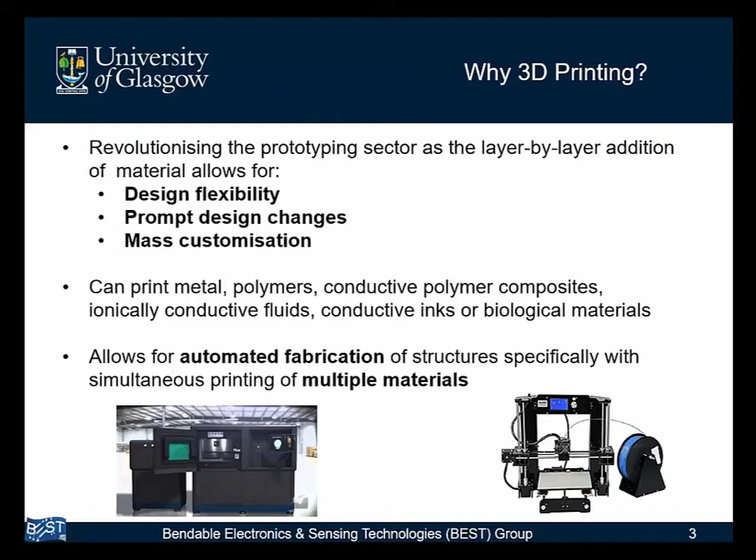In terms of materials, 3D printing has generally been associated with polymers and metals. However, now you can look at a bunch of different materials that can be printed using 3D printing, and we are hoping to exploit that possibility into many avenues. On top of that, from a fabrication point of view, 3D printing can provide automated fabrication with multiple materials simultaneously to help us achieve our goals.

In terms of 3D printed circuits and systems, the primary goal is that we can efficiently use the 3D space available within the structures. Particularly we can form complex geometries that we can't really attain using traditional fabrication techniques, particularly thinking about printing in and out of plane.

One example is the work we presented involving an embedded sensor with printed passive components. This is really interesting, particularly if you look at the long term and at customization and the way we can alter the shape and the different circuits within the shape. We can also start to think about bendability and bendable materials in terms of substrates and conductive materials as well.

Moving to multi-material 3D printing: it's quite difficult to integrate some of the established 3D printing techniques such as stereolithography, laser sintering, or binder jetting with multi-material printing in those systems. They're also quite difficult to set up and customize to your own specific use, and they're at a much higher cost than other types of 3D printers.

So if we look at fused deposition modeling and liquid deposition modeling, we can use the fact that they are open source, readily available, customizable, and low cost to our advantage. But the main point is that we can still print multiple materials at the same time.

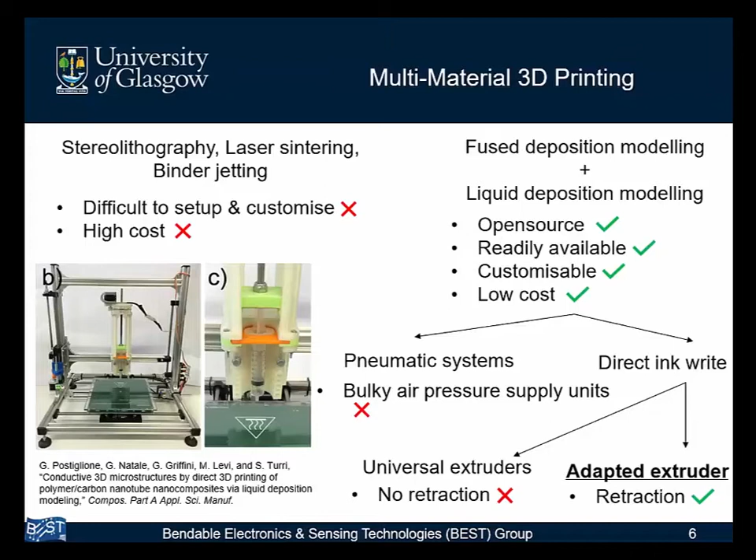For liquid deposition modeling, we've chosen a direct ink write method instead of pneumatic systems. Although pneumatic systems might provide a little better precision, with bulky air supply units they're probably not as readily available or distributable as direct write ink methods. Also, in terms of the extrusion mechanism, a key element to consider is retraction of the conductive inks during printing, because one thing you want to avoid when printing tracks or interconnects is cross linkages between the printed tracks.

So for multi-material 3D printing, we've gone for FDM for printing the substrate, but also printing some conductive materials, conductive solids, and adding a paste extrusion mechanism for the multi-material 3D printing.

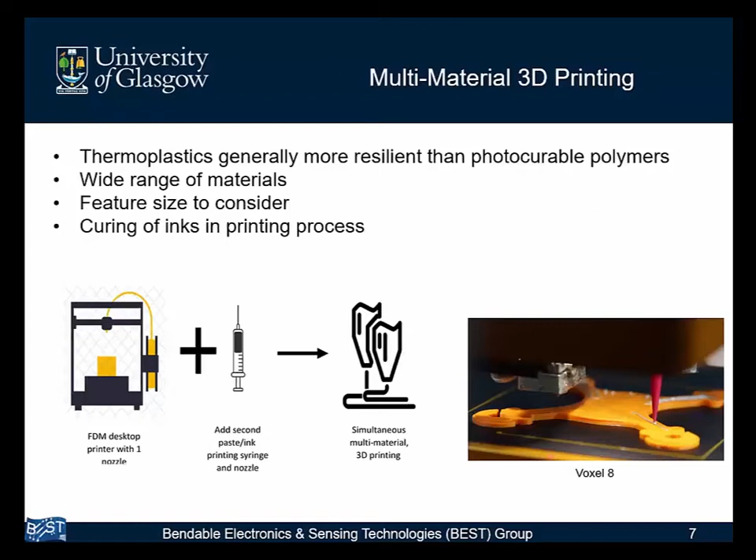Things to consider are our feature size, the curing process, and the materials, which I'll talk about in a minute. In terms of printer customization in our lab, we've integrated a readily available desktop 3D printer, the RepRap, and added the Discov3ry paste extrusion system to that.

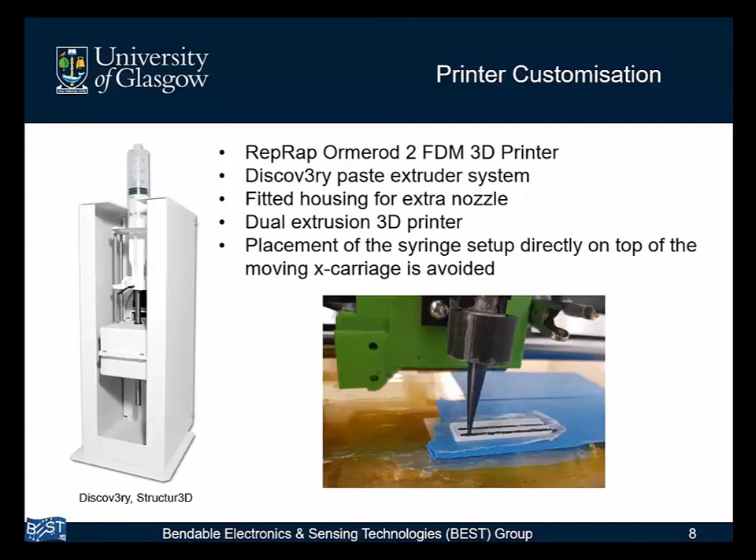One really strong advantage of the Discov3ry paste extruder system is that it's not directly placed on the X carriage of the 3D printer. By not placing it there, we avoid added vibrations to the printing setup while printing, which may cause discontinuity within the prints, especially with a large system and a large extrusion mechanism if we're looking at a large amount of material. But not only that, in case of a large weight on the X carriage, it might cause a misalignment between the printing X carriage and the bed level as well.

The paste flow itself goes through the syringe and through a Bowden tube, then through a Luer lock connector and through a nozzle. The particular nozzle we chose is 0.4 millimeters. However, another advantage of this is that the nozzle diameter is easily changed by changing the nozzle itself.

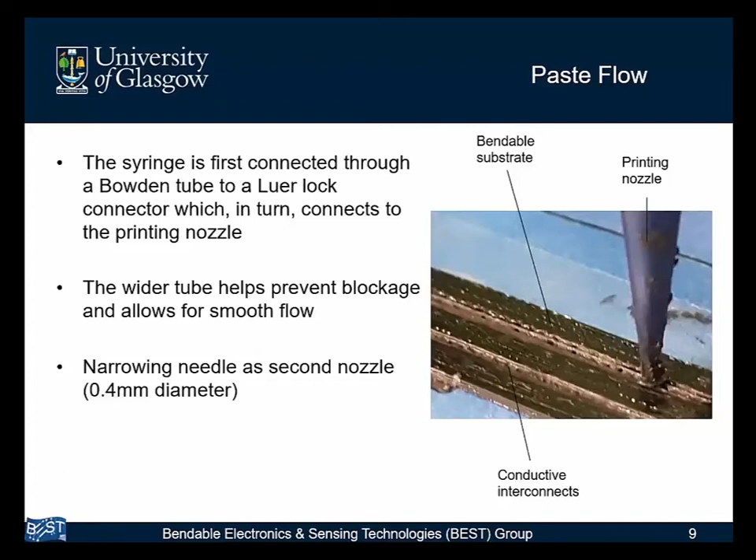In terms of paste flow, we can look at different properties. Specifically, with the specific properties of the paste itself, we can alter the velocity at which it's printed, and in turn the feature size we can get and the repeatability of the prints. Particularly, we look at the density of the inks, the viscosity, surface tension, and the droplet diameter as well.

Eventually, we're interested in the velocity of printing. We're interested in the parameters of printing in terms of the feed rate of the extruder mechanism, to be able to get the most reliable and repeatable results in terms of this printing mechanism.

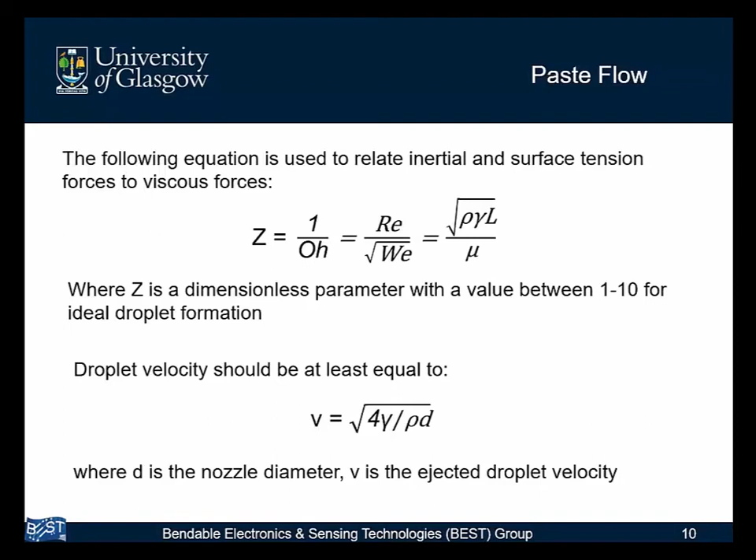Now, in terms of materials, packaging materials, there are many, but not many are bendable. One of them, a really good one, is TPU material, commercially known as NinjaFlex. It's bendable enough to allow for repeatable movement, and it allows for wearable applications and to follow reversible deformation. To this extent, it's quite useful to our eventual goals. But not only that, it also shows good adhesion to inks and other solids.

So in terms of printing thermoplastics, we're looking at a holistic system of 3D printed circuits, with some bendable parts and some non-bendable parts. With regards to PLA and ABS, NinjaFlex binds well, as well as binding with inks. Another important thing to note is that with such rubbery or bendable materials, it's important to print at a much lower speed to avoid any warping of the material during the printing mechanism.

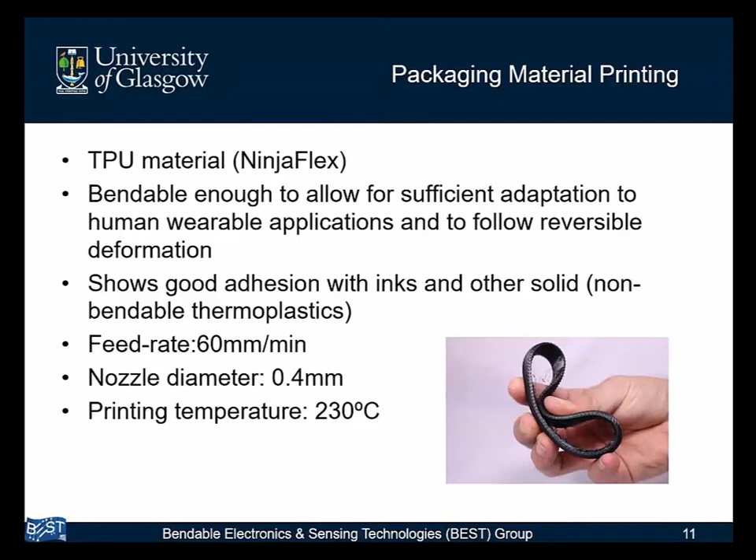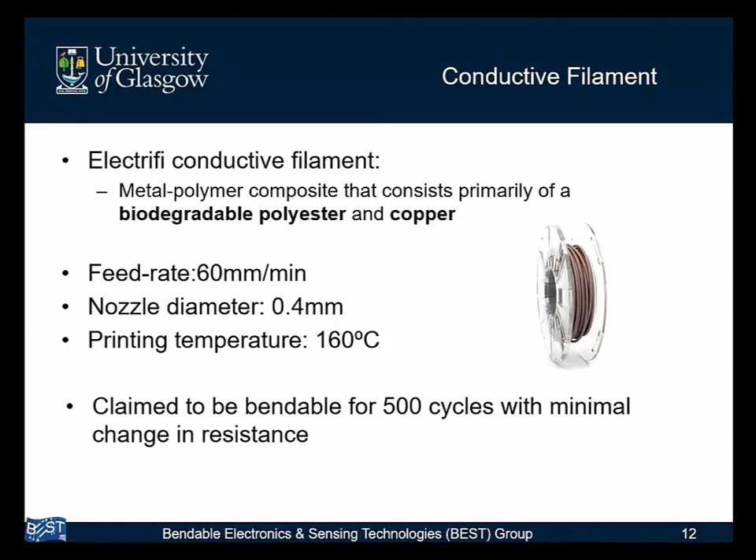Now, to look at the conductive interconnects for our 3D circuits, or particularly our bendable 3D circuits, we're looking at inks, but as well as conductive filaments. One conductive filament we went for is commercially known as Electrifi conductive filament, based on copper fillers and a biodegradable polyester. This was reported to have quite low resistivity, and even one study showed its bendability for around 500 cycles. So we thought it would be a good place to start in terms of this type of material study.

Now, in terms of the paste, which might be a bit more interesting because we can tweak it quite a lot more, although we can tweak the fillers in the thermoplastics as well. But in terms of the ink...

If you see some examples of 3D printed circuits, a lot of them are planar, first of all, but not only that, a lot of them use silver ink. And silver ink is quite expensive, but not only that, commercial inks don't allow us to alter the properties in terms of viscosity and the specific properties we need for repeatable printability. So we've used an in-house formulated graphite-based conductive ink.

The ink is primarily composed of graphite powder and isopropyl alcohol as a solvent, which we've found gives good printability. We've added a dispersant, Triton X-100, for better dispersion of the powder, and a binder of ethyl cellulose to better bind the conductive particles together during printing. The mixture is continuously stirred to get a homogeneous ink that allows proper dispersion of the graphite powder.

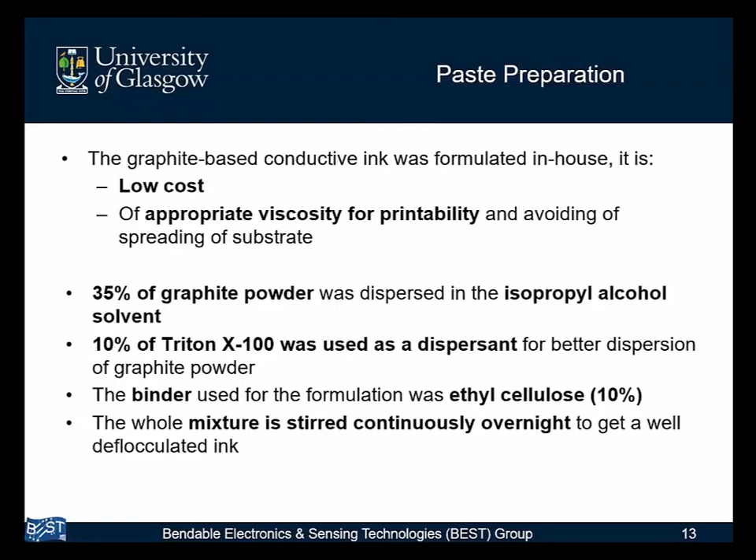In terms of binders for the ink, this can hopefully be taken forward, and by tweaking the printing mechanism for FDM printers, the cracks for the Electrifi filament can also be addressed. For resistivity measurements, to get an idea of the resistivity of these materials, the Electrifi filament showed a much higher resistivity than commercially stated, or even stated in other research. This was quite alarming to us, since we wanted a repeatable process, but it also opens our eyes, and the field's eyes, to producing filaments that suit a variety of printers, as well as the properties of printing itself, like printing temperature or speed.